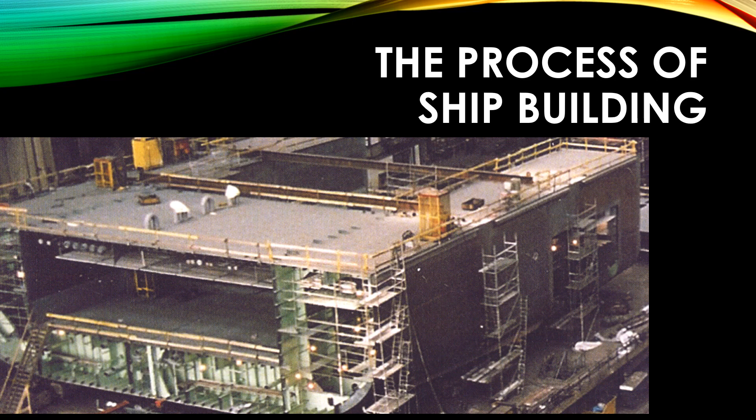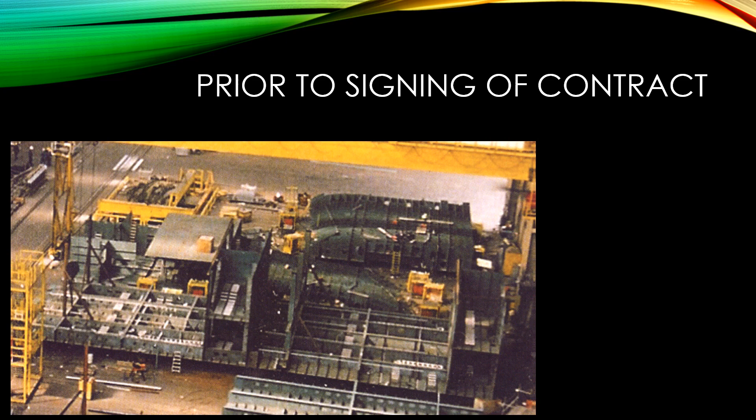Now, the advantages of a standardized ship and the disadvantages of a standardized ship are always, of course, there. So prior to the signing of the contract, of course, the owner or the shipping company will make it specific to the shipyard whether they want to build something to a standardized design. But before they do that, they have to consider the advantages and disadvantages.

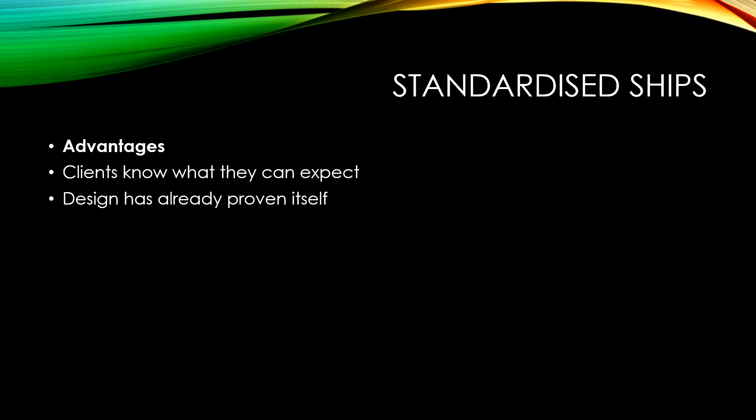So the advantages of a standardized ship are: the clients know what they can expect. The design has already proven itself and can be optimized during the series. The price and construction are exactly known.

The almost complete absence of the design and engineering development period shortens the delivery period of later ships in the series, because once the shipyard has built a ship and then they have to build similar ships, they can work faster. And the cost for design and engineering of the ships is spread over multiple ships, so the overall cost per ship is lower. However, building standardized ships also has its own disadvantages.

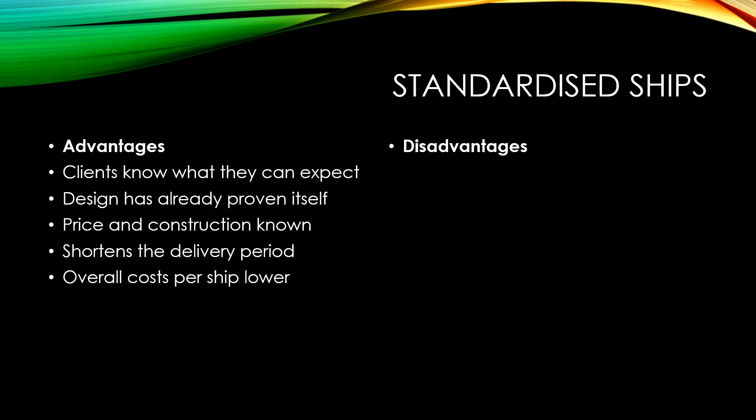The disadvantages of a standardized ship are: the design may not be entirely suitable for the demands of the shipping company. The involvement of the shipping company is limited to only details. And more competitors may operate the same ships that are not optimized for a particular trade or shipping company.

In spite of the disadvantages, shipyards have introduced good and versatile standardized ships in recent years. Some shipping companies are now ordering whole series of these ships with sometimes only a few modifications to the design. However, each modification of course costs the shipping company extra.

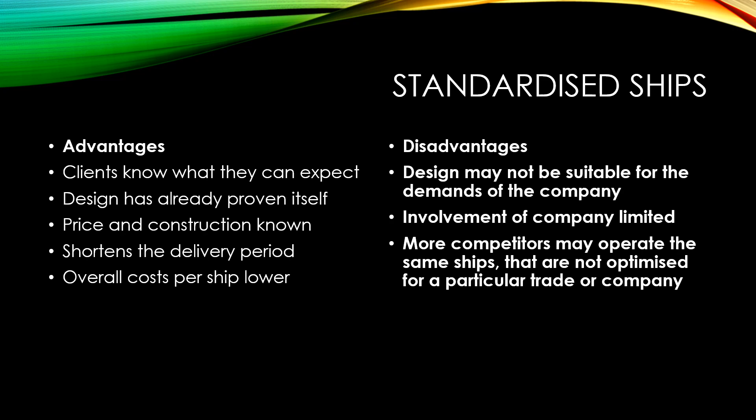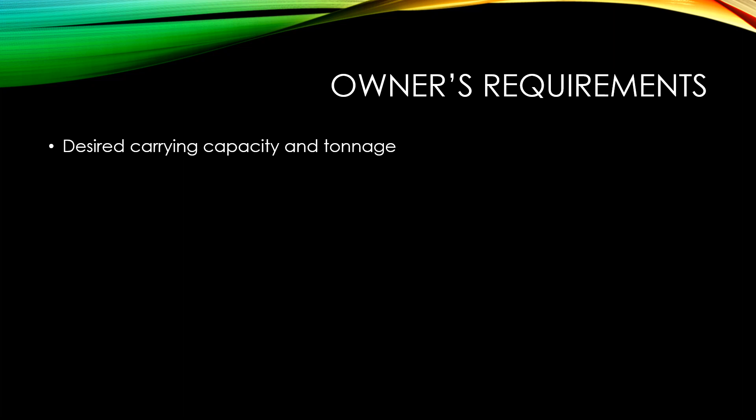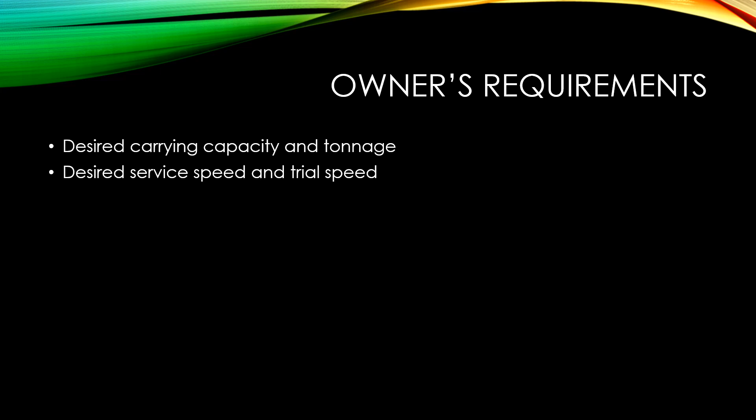In terms of owners' requirements, most shipping companies first define formal owner requirements, in particular if the ship will be newly designed and optimized for the shipping company. This is a list of demands which the ship has to fulfill. It specifies several characteristics of the new ship, like the desired carrying capacity and tonnage, the desired service speed and trial speed, types of cargo the ship must be able to transport, cargo hold layout, system of hatches and hatch covers, the necessity, capacity, safe working load and type of cargo gear,

preferred suppliers of the engines, auxiliaries, navigation equipment, cargo gear, etc., number of crew and passengers to determine the number of cabins, composition of the crew, luxury and dimensions of the cabins and general accommodation, operational area, operational range to determine the size of the fuel tanks and storage compartments, limitations to the size of the ship in respect to the routes it will navigate, for example, bridges, locks, water depths, etc.

Special demands like strengthening for navigation in ice if they are ice class vessels, or ramps on the side of the ship. If freight contracts have already been made, the ultimate completion date, and required certification, classification society, as well as flag of registration.

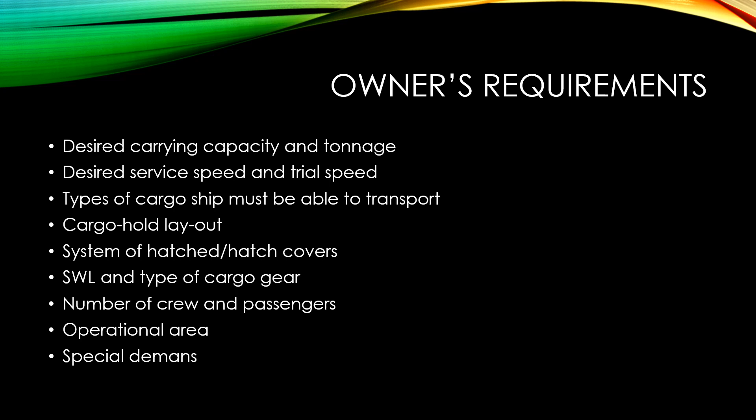The shipping company then submits this list of demands as a call for tenders to several shipyards. The shipyards will then inform the shipping company if they are interested in preparing a tender for design and construction of the required ship or ships.

This may depend on the technical capability of the shipyard and experience with the ship type, the capacity and earliest delivery time that the shipyard can offer, the amount of material and manpower that is required in the available time, special interest of the shipyard to build such a type of ship, expected price level, and expected competition.

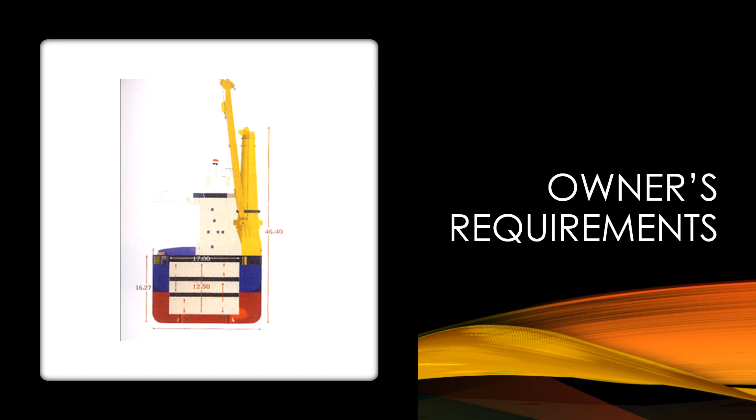After informative talks, the shipping company sets a time period in which the shipyards can submit an offer or a tender or a quotation without any kind of commitment or engagement. This means that the shipping company does not have to pay for the offer and that the shipyards do not know which one will get the contract. Sometimes the shipping company already has a preference for a particular shipyard and then the offers are used in the negotiations with the preferred yard.

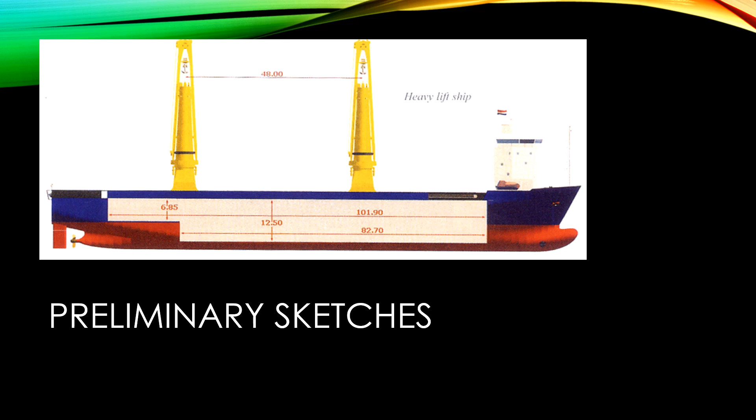The offer without engagement or commitment is the response of the shipyard to the invitation to tender. This offer consists of a preliminary design, which in turn consists of an outline specification, a preliminary general arrangement plan, and an estimation of the price. The outline specification is a brief technical description, and the general arrangement plan is a side and top view of the ship which shows the arrangement of the relevant spaces in the vessels.

On the basis of a comparison of the offers, a shipping company will continue negotiations with 2 or 3 shipyards. The preliminary design for the tender is prepared in the project department or the design department of the shipyard. This requires a lot of calculations and design work, especially if the design is entirely new.

The demands on naval architects, computer-aided design programs, and designers are quite heavy, and if the shipyard is too small to carry out such an amount of design and calculation work in a small period, they may cooperate with other shipyards or subcontract the work to specialized design offices.

Various CAD, that is computer-aided design programs, are used for activities such as the design and optimization of the hull form, general arrangement of hull, decks and superstructures, hydrostatic calculations both for the trim and stability of the ship in various loading conditions and for checking stability in case of damage to determine the chance of survival. So the program actually simulates the conditions that a ship may encounter at sea, checks the behavior of the ship, and then they plan to build the ship accordingly.

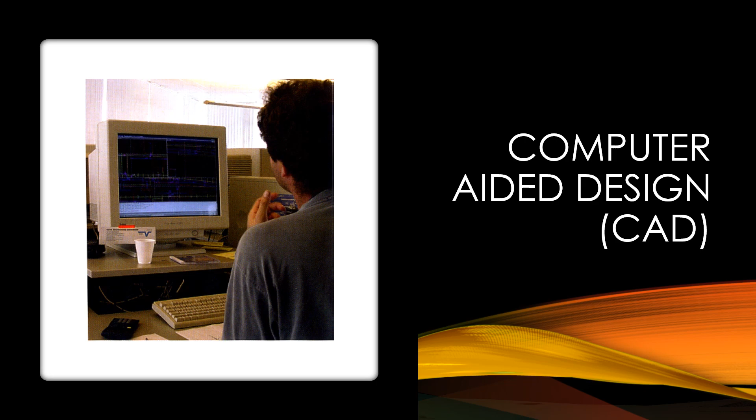After having studied all the offers, the shipping company can make a final choice for a particular design and start negotiations with 1 or 2 shipyards to finalize the contract price and specification, resulting in a contract for the building of the ship between the ship owner and a yard.

In other cases, the shipping company can elaborate their chosen design, prepare a detailed building specification of the ship, and a preliminary cost estimation. This detailed building specification of the ship owners can then be sent to 2 or 3 shipyards for a more detailed offer to complete the design and construct the ship.

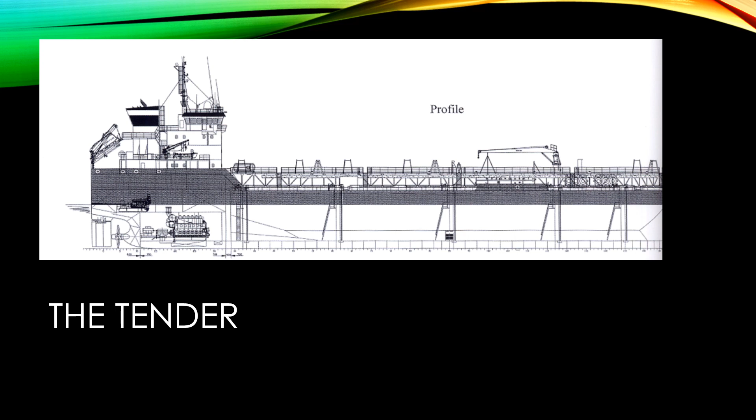Now this document may be hundreds or 200 pages long. It's a thick document. So this procedure is called a tender, and participating in it is called to tender. For state-owned companies, sometimes they demand an open tender in which other shipyards can also partake.

Sometimes it can take months for the shipyards to detail the design and the specification of systems in the ship to be built and to calculate an accurate price for the tender, but they still do not receive any money. There are still no obligations or commitments.

The financing scheme has to be determined, often together with the bank of the shipyard, to negotiate the invoice periods with the ship owner. Some shipyards may offer a financing scheme in which the ship owner only pays 10% at the signing of the contract and 90% at the delivery of the ship. This can be more attractive to the owner than payment schemes that require advance payment to the yard before even building has started.

Finally, the order will be granted to one of the shipyards. In this choice, not just the price is taken into consideration, but also other factors like the delivery date, the efficiency, the reputation of the shipyard, and if the shipyard has constructed a vessel for the shipping company before.

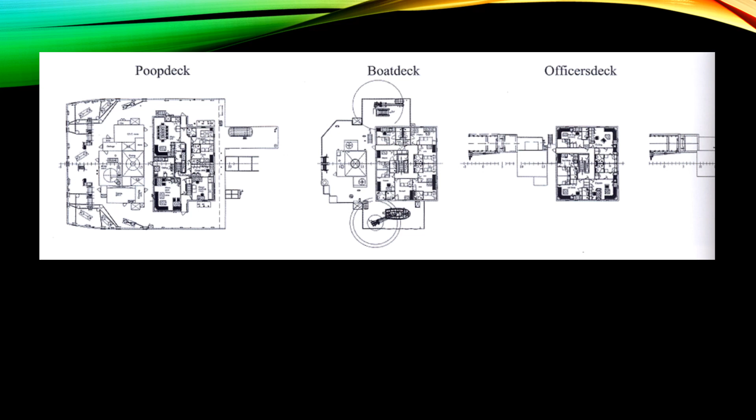Remember, it works pretty much similar to how a house is built, but of course on a much broader scale. So think about it, if you have land and you want to build a house, how would you go about it? You would be talking to a lot of builders, taking tenders, price quotations, submitting your plans. Of course, if the builder has their own plans, then it will be easier and more efficient for them to quote a price. So that is how it works, pretty similar to that.

If you have ever built a house, or if you ever build one in the future, you will know how it all works. It's pretty similar to that.

So after all this, sometimes after all this work lasting up to a year, the parties that are involved sign the final building contract. The building contract establishes all the legal positions and commercial conditions between the shipyard, the shipping company, and often also the financier, and is always related to a signed contract specification and a signed general arrangement of the ship.

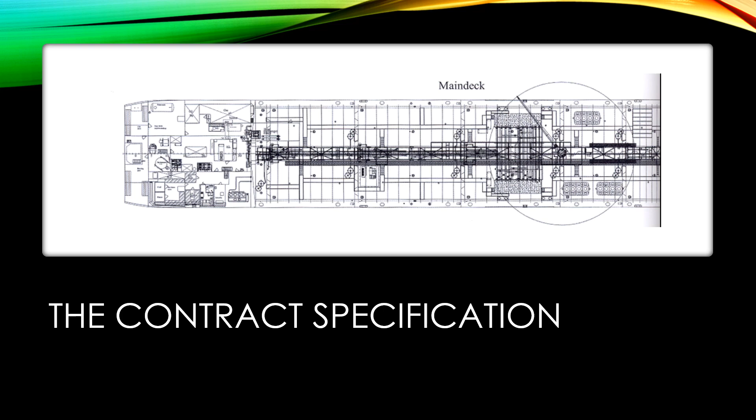So when the building contract has been signed, all the parties have obligations that start with the first down payment and end with the delivery on completion and the final payment. The shipyard gives a yard number to the future ship, which is stated on all the drawings and documentation.

If you see the plans, the general arrangement plan or any other plans, and I've made videos on that as well, you will see at the bottom of the plan, normally in the bottom right hand corner, the yard number is mentioned. That is the yard number I'm referring to. So at this point, once the yard number is allotted, the clock starts to tick for the time of construction.

Within the contract, there will be a provision to allow for price adjustments should any changes to the original design be made at some stage during the building period. So if the shipping company or the ship owner start asking for some modifications to the design, you would have to pay extra money. It's just like a house, once the design is set and everything done, if you try to make any modifications, you will have to pay extra money.

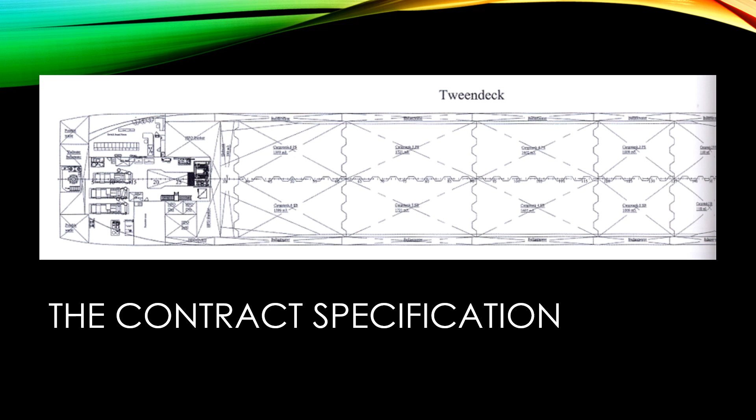So for any alterations or additional components compared to the contract specification, the additional price will be estimated, negotiated, and fixed. The payment will be settled at a later date in accordance with the provisions made in the contract. Now, of course, if the alterations are not major, sometimes the shipyard may not even charge any money. It depends on the relation they have with the shipping company, how many ships have been ordered, how much money is at stake. They want the business. They don't want to offend the shipping company or the ship owner either.

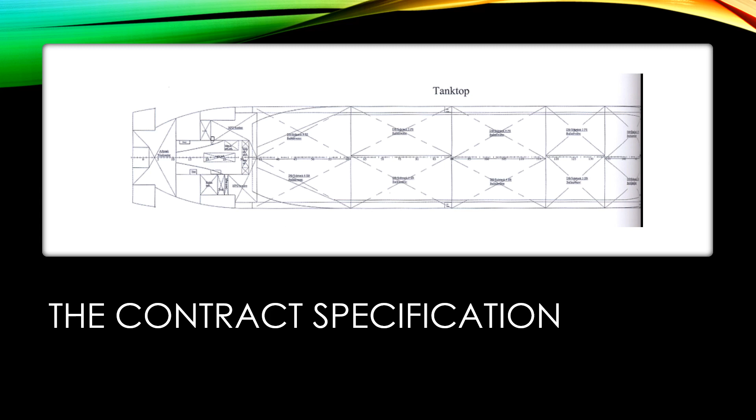So the building time as agreed in the contract comprises the design phase and the building phase. The design period varies from 6 to 18 months, depending on the complexity of the ship. The building period varies between 6 and 24 months. A building team may be formed by the shipping company and the shipyard, who both appoint project managers, who are responsible for the entire building process until the delivery, each person in his or her own field of expertise.

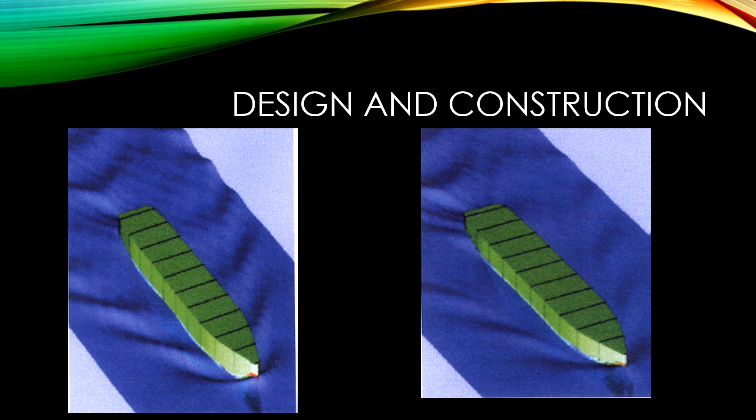So most shipyards have a project or design department in which preliminary designs are prepared and where the final design calculations are made for the ship designs that then become ship contracts. Now these final designs will be elaborated in every detail of the construction and systems in the ship in the engineering department. This engineering department used to be called the drawing office, but nowadays in most shipyards the engineering is prepared behind workstations by engineers using computer aided engineering systems. There is not a single drawing table to be found these days, of course.

The ship is elaborated in detail in construction drawings. The diagrams of all the mechanical, hydraulic, pneumatic and electrical systems are detailed, and the accommodation is also drawn in. Most relevant drawings have to be submitted to the classification society where the ship is to be classed, and to the regulating body in the country where the ship is to be, of course, registered, which becomes the flag state. So even though people from the shipping company are in the building team, some drawings still need approval from the management of the shipping company.

Furthermore, every detail of the engineered construction or system has to comply with the rules of the classification society, which regularly sends their inspectors to the shipyards to assure compliance with initially approved drawings. Some shipyards have a small engineering department, mostly focusing on project management. They will subcontract the engineering package to an independent marine engineering office, to their co-makers for the electrical installation, engine room installation, aircon installation, etc. Or they will cooperate with other shipyards.

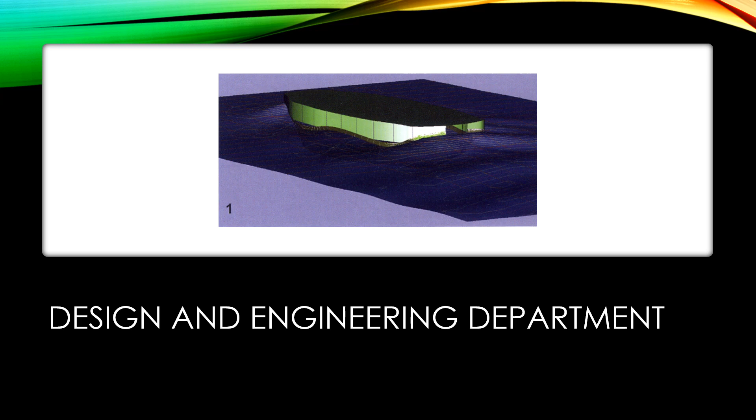The detailed engineering of a ship design to a complete and approved set of drawings takes tens of thousands or even hundreds of thousands of man-hours. This is costly and as a rule of thumb up to 10% of the total building price. In many countries, there is a good cooperation between the various shipyards, and standardization has led to a better match of products and computer programs. This makes it increasingly easy for shipyards to build parts for each other.

Now you can draw comparisons again between how a ship is built and a house is built, because even when you're building a house, say if you have land and you're building a house, often the builder may subcontract electrical work or plastering work or roof work to other subcontractors with whom they have a good relationship. For certain difficult areas of design, specialist research and engineering firms are approached. These firms can advise the shipyards in the optimization of the shape of the ship, the calculation of noise and vibrations, the optimization of the propellers, ducts, and rudders.

Research on the hull is done both by computer calculations and results of model testing in a model tank. That is what I was showing you before. So the resistance curves are obtained by measuring the required propulsion power at different drafts and speeds. In addition to this, research is done on the influence of waves on speed, the necessary propulsion power, navigability, rolling and pitching behavior, and maneuverability of the ship. With very large ships, of course, research is done on the extreme forces and moments of inertia that arise in the ship in case of heavy waves and seas.

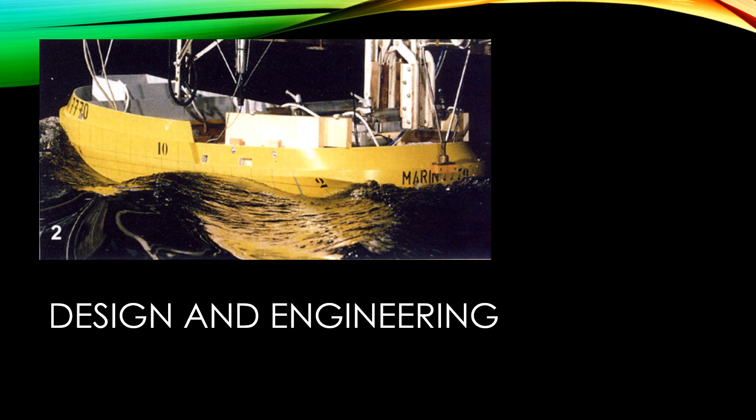In the Australian Maritime College, we also have towing tank facilities where such simulations are carried out to study ship behaviors as well as behaviors of the submarines. Now the optimization of the ship's shape is a very laborious task where measuring and calculation go hand in hand.

Now I showed you before the wave pattern of a ship at a certain speed before and after optimization. After optimization, the ship makes fewer waves, so the optimization procedure has reduced the wave resistance. The bulbous bow has already reduced this resistance because the wave produced by the bulbous bow counteracts the bow wave. However, this is only one effect that is accounted for in the optimization process. There are many other effects that can further minimize the wave resistance.

Now the production preparation department gets the construction drawings from the engineering department to prepare the material ordering list and the job descriptions for the production of the block sections. Every individual steel part gets its own individual code and description, type of material, block, section number, etc. With the aid of a computer program, a nesting engineer nests a collection of steel parts with the same material type and thickness in rectangular steel plates.

The goal of the nesting process is that the construction parts for the ship are located in such a pattern in the available steel plates that there is a minimal amount of waste material after cutting all the parts out of the base plate. On the numerically controlled steel cutting machine, a computer also controls the cutting torch, for instance an autogenous flame cutting torch or a plasma cutter in a water bath.

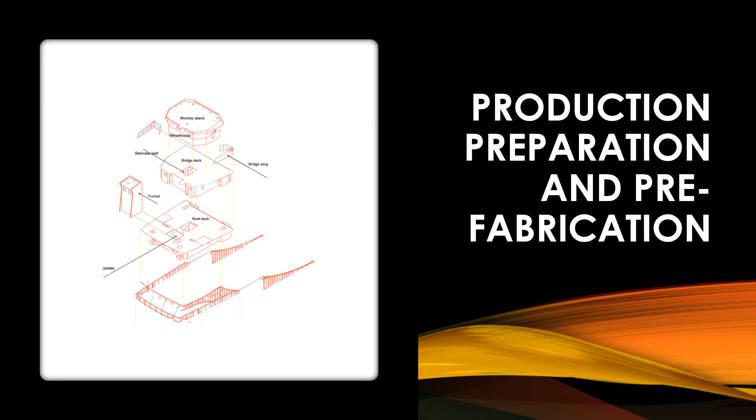A ship is constructed in various stages which can sometimes overlap: prefabrication of steel parts, building of flat panels, building of block sections, assembling of hull and deck house on a slipway, installation and outfitting of systems and components, painting of individual parts, final painting layers on the outside hull, launching of the ship, outfitting and subsequent completion, system trials at the shipyard, sea trial. There's a lot going on and a lot of things involved. So automation of the construction has led to more efficiency.

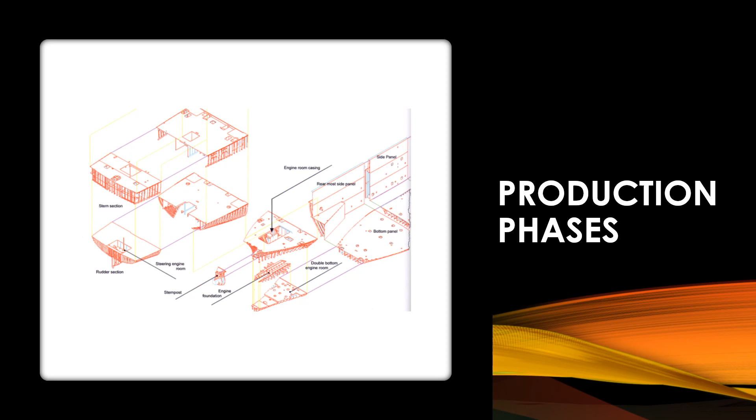Furthermore, the sections will be engineered in such a way that as much assembly welding as possible can be done by semi-automatic welding and robots. Building by block section enables parts of the double bottom, the foreship and the aft ship to be welded whilst lying upside down in the workplace. This way of welding produces a uniform quality of the welds with less production time. Because access to the different blocks is much more restricted when they are joined together, the ship systems are pre-outfitted in the sections as far as practicable prior to the joining.

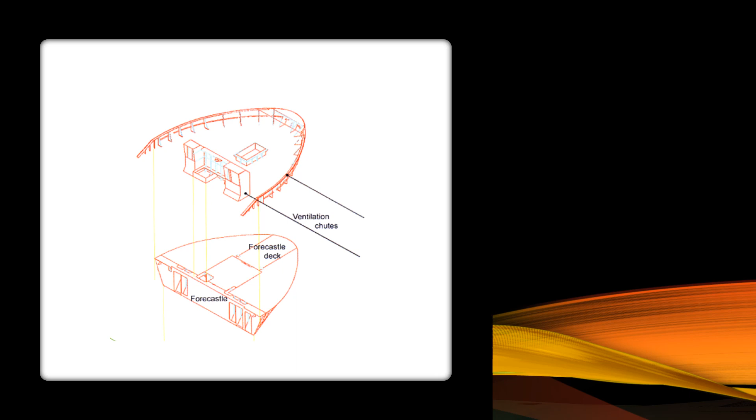So all these parts of the ship are built in different places, and then they are brought together to be joined. This means that the piping systems, tanks, fillers, filters and other small auxiliaries are all placed in the section before the joining of the blocks. The building of a ship used to begin with the placing of a keel plate. The rest of the construction was then connected to this first item. Today, laying the keel means that the first bottom block is placed in the assembly hall or on the building berth. Subsequently, the other blocks of the ship are built to or on this. At this stage, the production is well underway.

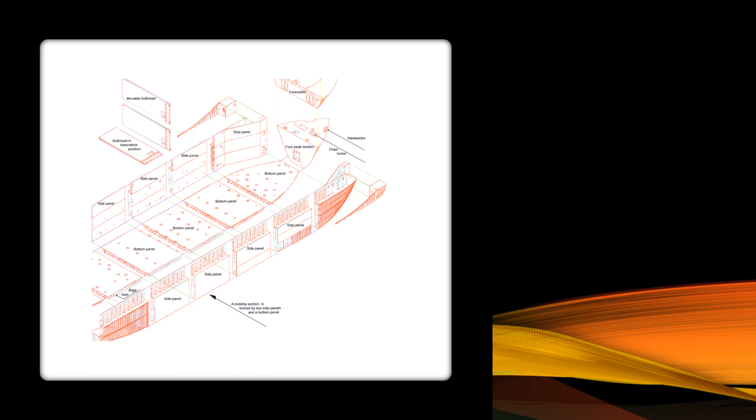The launching of a ship can be longitudinally or transversely. I'll show you some pictures and then you understand what is launching of a ship. So transverse launching means sideways launching. Longitudinal means, of course, it is as per the length. Either the aft is launched into the water first or the forward part of the vessel is launched into the water first.

It depends on the layout of the shipyard and the slipway, and is always an exciting moment because at the moment the ship is launched, there is no way of stopping it. There's a lot of water that splashes around it. And this is a big occasion, of course, in the shipyard when the ship is initially launched.

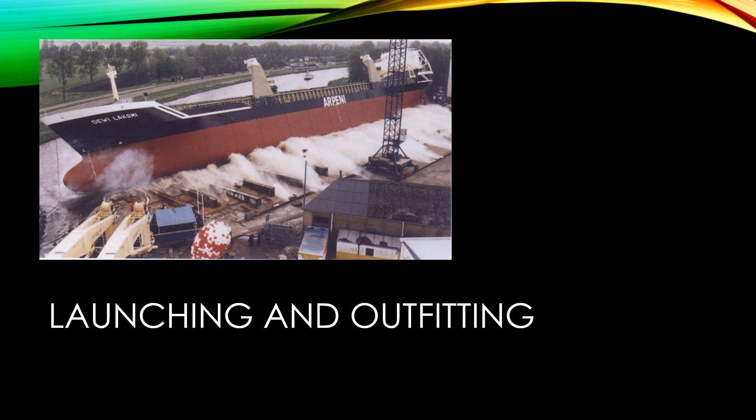So after the launch, the final items like mast, hatches, sometimes the engines, funnels, ventilation shafts, cranes, they are all added to the ship at the fitting out berth. Finally, the cabins and other spaces are furnished and the inventory is brought on board. So inventory is not a yard supply. They are supplied by normally independent suppliers and vendors.

So when the ship's electrical systems are ready, the switchboard is connected to the shore supply to get power. After careful checking, a diesel generator is started and electric power from the generator is supplied to the switchboard, and the ship can then begin to function independently from the shore power. Upon completion of the vessel in the shipyard, the final testing of all systems will be conducted at the shipyard, with the exception of items which can only be tested during the sea trials in the open sea.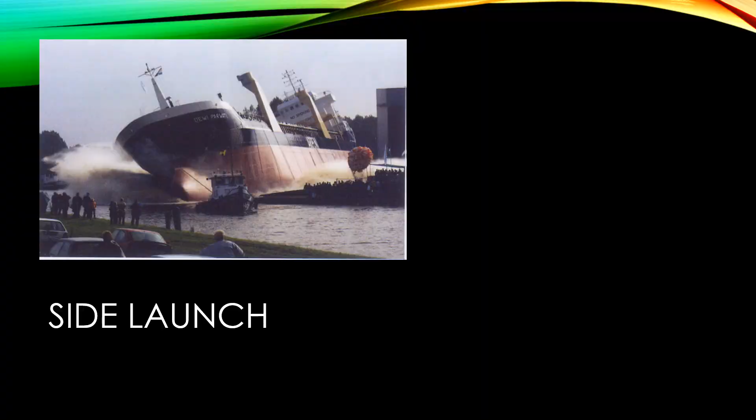Now let's talk about commissioning. I don't know whether you know what commissioning is. During commissioning, a very important item is the inclination test and the lightship weight measurement test. I've talked about the inclination test in a separate video. Maybe you can find it in the folder of ship stability. I have a lot of videos on ship stability and one of them is on inclination test.

The inclination test is carried out to find the position of the center of gravity in height. So moving a known weight from midships to both sides alternatively and measuring very accurately the list during the various steps in that procedure make it possible to calculate the position of the center of gravity in height. This is a very important figure for the stability calculations.

Final testing at the shipyard is related to electrical systems, engines, generators, pumps, technical equipment, life-saving equipment, light ship weight measurement, and of course, like I said, the inclining experiment. In principle, all these tests will be carried out in the presence of the owner's representatives, classification society surveyors, and sometimes even the flag state surveyors or flag state representatives. Final testing in open sea is mainly related to final testing of machinery under working conditions, fuel consumption, vessel speed, rudder test, and anchor test.

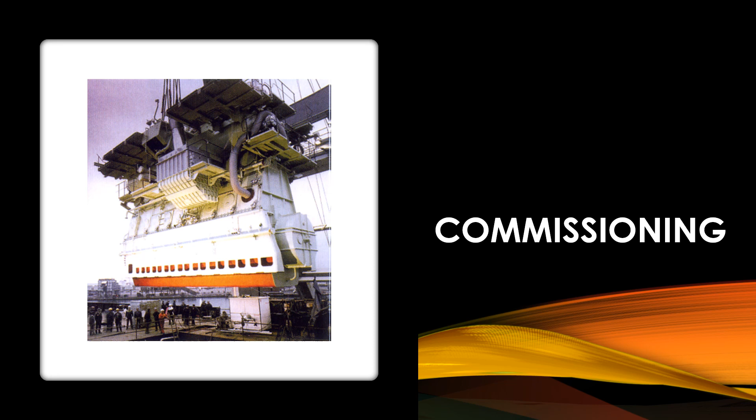Next is the first technical sea trial, which can take from a few hours to several days. This is the first time that the ship leaves the shore and is completely self-reliant. The ship as a whole and all of its parts are extensively tested and all the results are carefully recorded. The classification society and the flag state are also present to see if all the demands are met.

In general, these trials are successful, but there are always small issues and imperfections which can be corrected during or after the trial. The exact behavior of the ship in open sea will become clear when the ship is in use. However, the speed and fuel consumption of the empty ship can be measured during the sea trials.

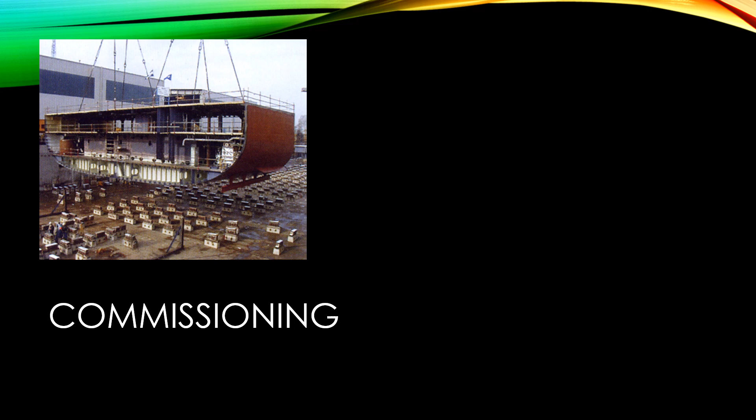More and more shipyards are advertising short delivery periods and more shipping companies demand them. In order to facilitate this trend, lots of shipyards subcontract other shipyards to build parts for the ship. It is also common that the hull of the ship is constructed in low-wage countries, cheaper countries where they have to pay less for labor, and that the hull is fitted out and completed locally.

But even without these measures, all the semi-finished parts must be ready for the next phase of construction to commence. Besides, all the purchased parts must be ready in time, but not too early, because the cost for the storage and the interest keeps changing, and sometimes it can go up to large amounts of money.

So keeping the construction process manageable requires that a proper overall planning of the project in terms of technicalities, logistics, and finance should be available any time of the day. Such a management system integrates and controls data from the production or the preparation, design, purchase, stocks, administration, and project management.

The shipping company and certifying authorities will finally accept the ship subject to the issue of the relevant certificates and a successful sea trial test. During a short voyage, the protocol of consignment is signed. The shipyard's flag will be exchanged for the flag of the shipping company, and the financier pays the last installment. Because there is usually a 12-month period of guarantee on the ship, the shipping company usually requires a bank guarantee from the shipyard. This is called upon when the shipyard cannot or refuses to comply with the guarantee.

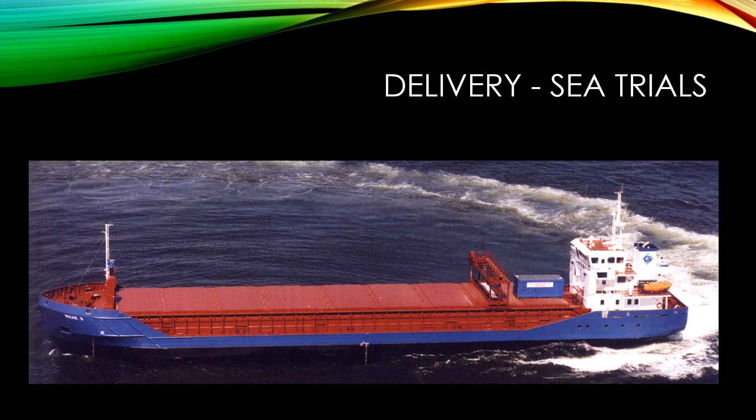The guarantee conditions are an integral part of the building contract because, just like any other product, the ship has a period of guarantee. Normally, this is about 12 months after the delivery of the vessel. The shipyard almost always takes over the guarantee conditions and periods of the companies supplying the different ship components and transfers them to the ship owner at delivery.

So if the ship needs repairing within the period of guarantee, the vessel's location and the urgency of the repair jobs determine who will repair the vessel and where it is done. So if the ship cannot be repaired by the shipyard, for instance because the ship is in another country or another port, the shipping company is allowed to have the ship repaired by a third party, but only if the cost of repairing the ship is not more than the price the shipyard would ask. This condition protects the shipyards against excessive bills if there is a deal between the shipping company and the repair yard.

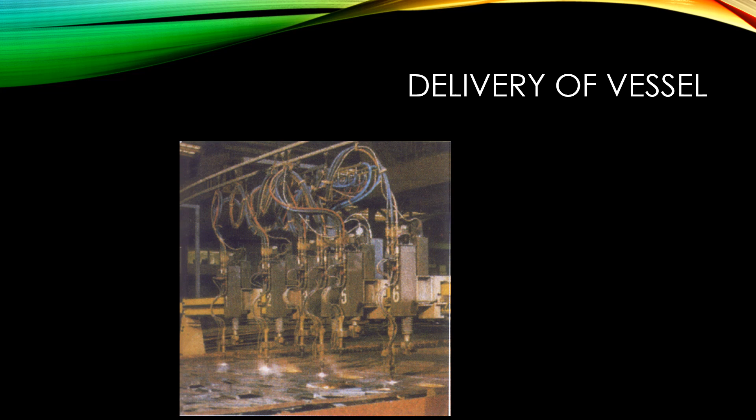So repairs of components and equipment are almost exclusively done by local service dealers, especially when the parts are of a well-known brand. This is always done in consultation with the shipyard or the supplier. The crew is prohibited to do repairs during the period of guarantee unless the repairs are absolutely necessary to the operation of the ship. If this is the case, the shipyard has to be contacted for consultation first.

Sometimes suppliers have 2 periods of guarantee for their product. The first period covers some months after delivery from the factory. The second period covers some months after the product is put into operation. The reason for this is that there is sometimes a long period between the delivery to the shipyard and the time the component is put into operation.